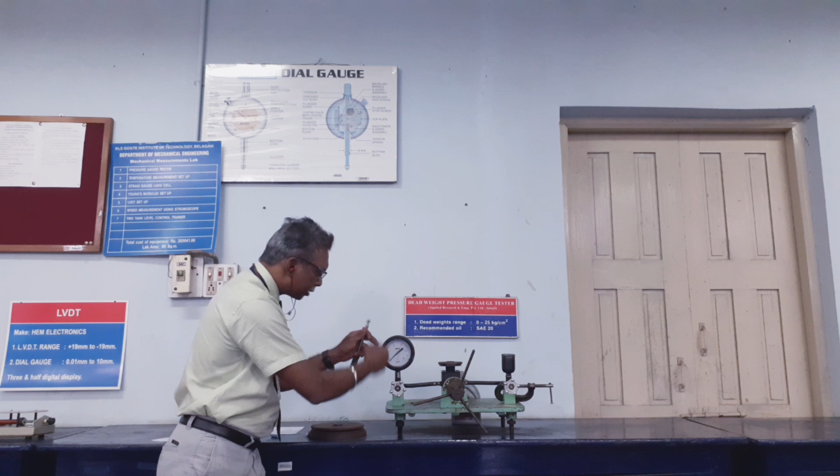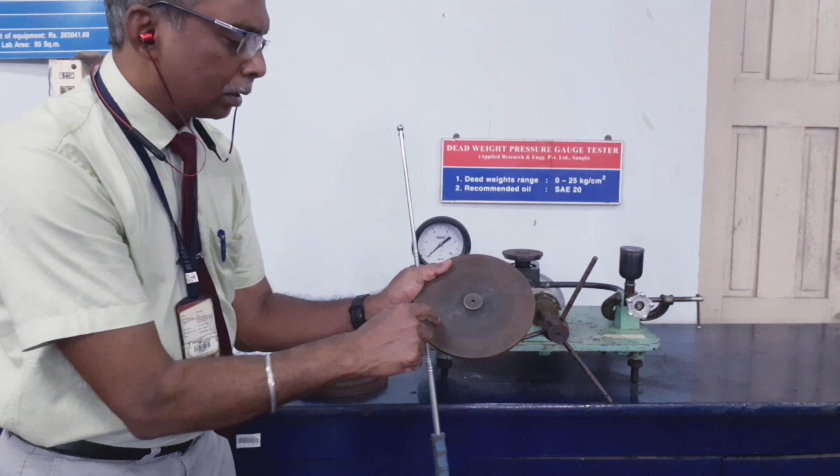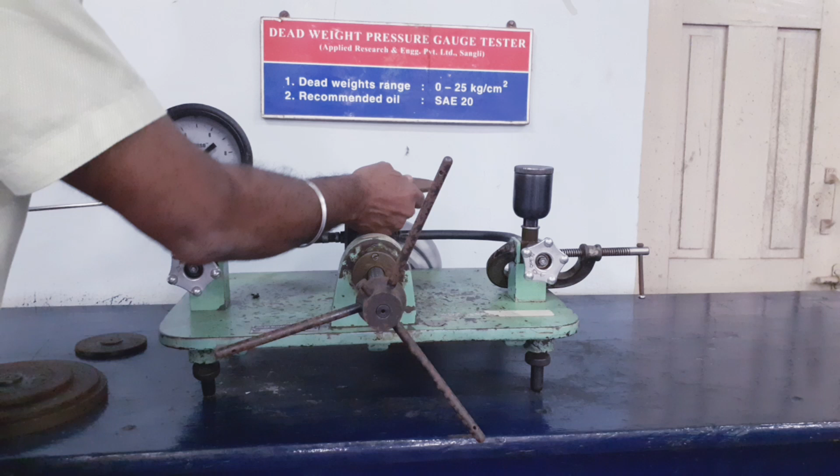For this we need something which can be used as a standard. What I mean, see here, if this pressure gauge indicates the value of 2 kg per centimeter square, I must be sure that I have applied 2 kg per centimeter square. So how do you make sure? See here, these are the plates, pressure plates, on which the value has been mentioned as 2 kg per centimeter square. When you place this above the platform, there is a platform here, and this self weight is 0.5. So when we place a weight of 2 kg here, the net weight will be 2.5 kg per

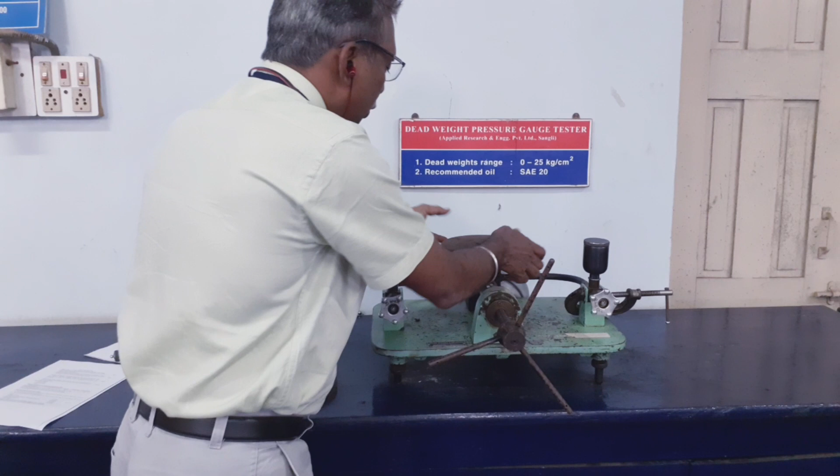centimeter square. Please note, I repeatedly say here that this itself is not 2 kg. This is not 2 kg. But when you place this entire casting, this is a cast product, one piece, on the platform, based on the cylinder diameter and the piston ring here, it will exert a pressure of 2 kg per centimeter square. Then when I am applying 2.5 kg per centimeter square, if the pressure gauge indicates 2.5 kg per centimeter square, it means that the pressure gauge is perfectly okay and it has a zero error.

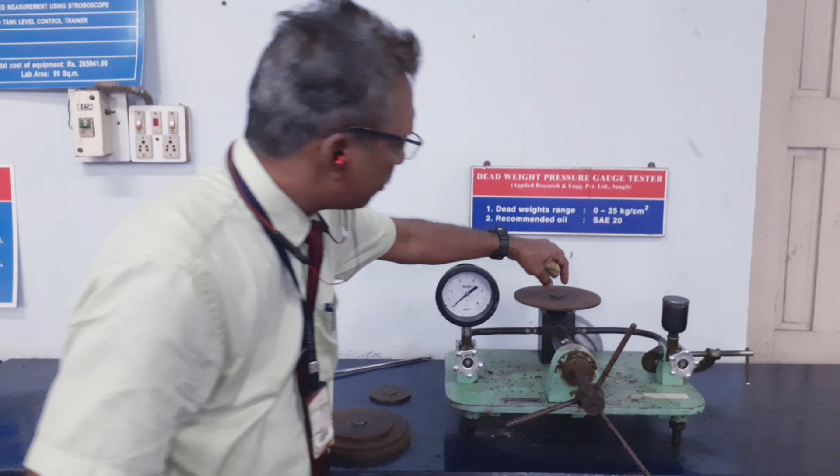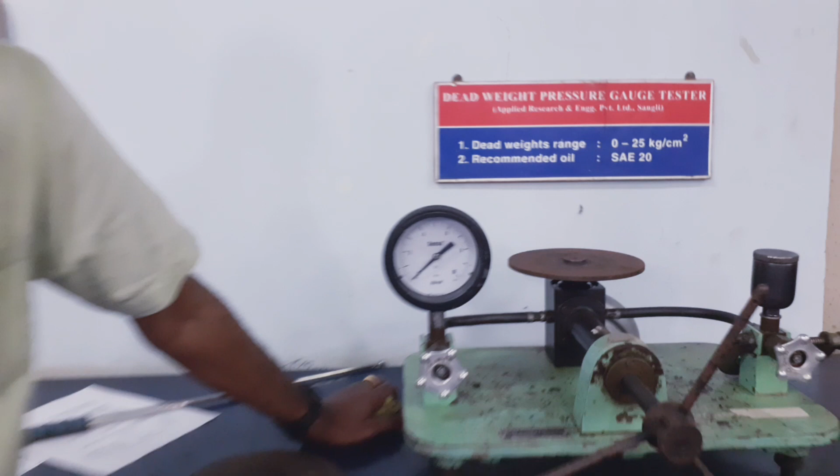Note that no instrument in the world has a zero error. The instruments will have some minor error here and there. We need to adjust with those or give the calibration. So the very purpose of calibration is to identify how much is the error, apply that error either on the plus side or on the minus side. Say I am sure that this is 2.5 kg, and if my pressure gauge shows 2 kg, I can say that whenever the pressure gauge shows 2 kg per centimeter square, the actual value is 2.5 kg per centimeter square. And if it is showing 3, then how much is it? We need to apply and find out.

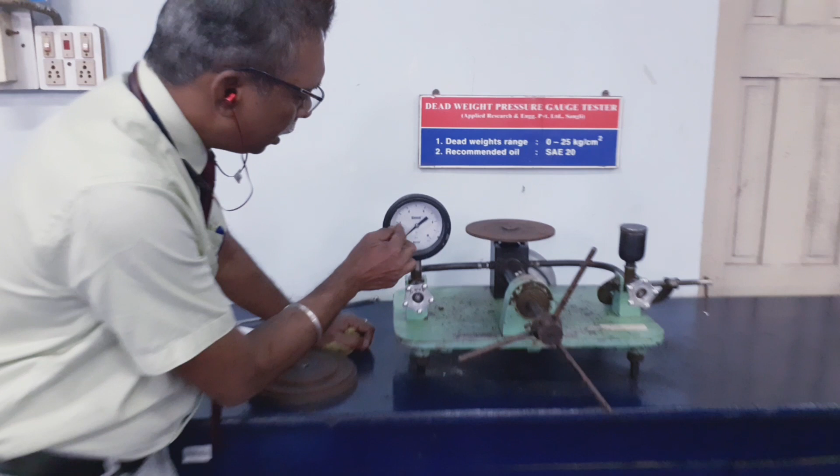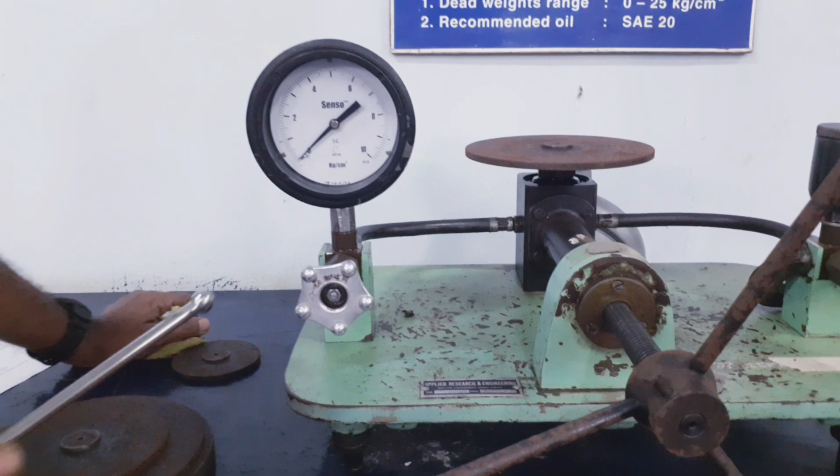Another question may come, sir, can we extrapolate the number? Say for 1 kg there is a 0.2 kg error. So can you say for 2 kg it is 0.4 and for 3 kg it is 0.6? Not necessarily. We are going to deal here with altogether different kinds of measuring systems. Some measuring systems may have linear errors. Some may have non-linear behavior. For example, the pressure gauge: up to 4 kg per centimeter square, it may have 0.1, 0.2 error. Once you cross 4 to 6, it may show 0.5 error. If you cross 6 to 8, it may show 0.8 error. We don't know how the instrument behaves.

So for example, the 50 feet tape. This must be easy for you to visualize. Because of the wear and tear on the ground, outside, rain, sun, and handling by workers, normally the first few inches of the 50 feet tape are cut off. It always happens. And we start measuring from the first foot onwards. Whenever the 50th foot is counted, we mean it is 49. What happened to that one additional foot? That was discounted right in the beginning because it was cut off, either 4 inch or 5 inch. We take a reading from the first foot right up till the 50th foot, so what remains is 49 feet.

But if you forget, 4 or 5 inches is getting deducted in your 50 feet every time. So this is a compounded error. Every time that you measure, you are losing 4 inch or 5 inch. But this can be minimized straight away. So it is linear error. You measure 50 times, each time you are measuring 4 inches less. So that is linear error. But in cases like pressure gauge or LVDT, the errors could be non-linear up to one range. So calibration is always done for a range.

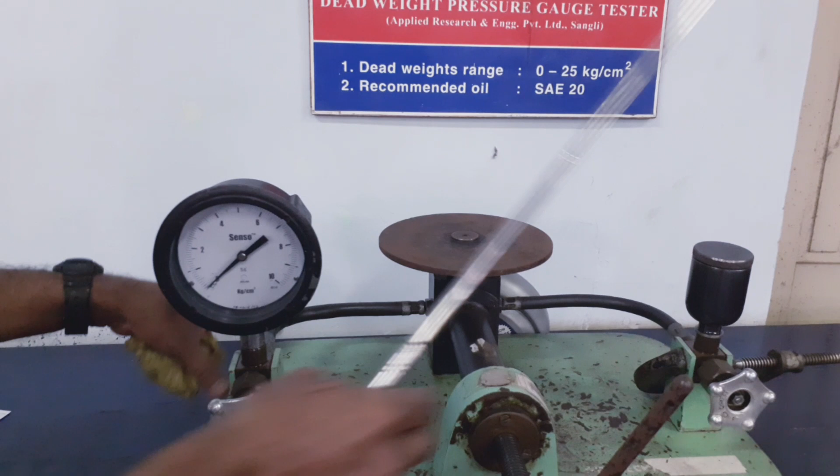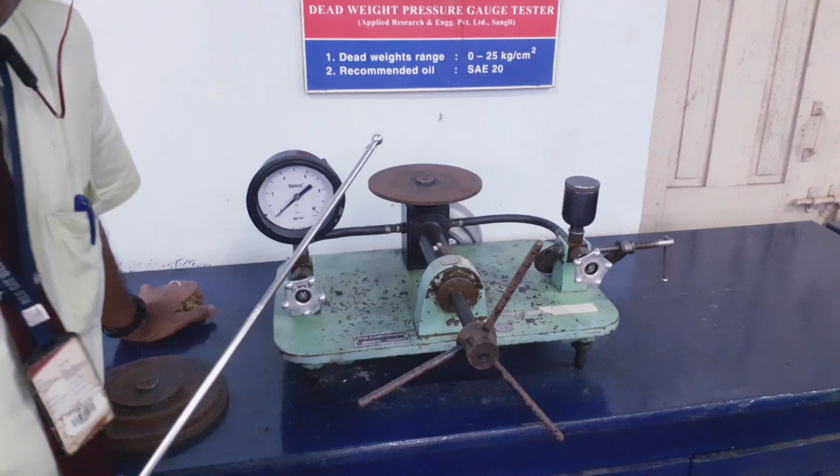See, I may calibrate with the dead weight here. This is a dead weight pressure gauge tester. Its range is 0 to 25 kg per centimeter square, which means that we can mount any pressure gauge which can measure up to 25 kg per centimeter square, and that can be calibrated. Now, for calibration of 25 kg, I need to have 25 kg weight with me. Then only I can calibrate, not otherwise.

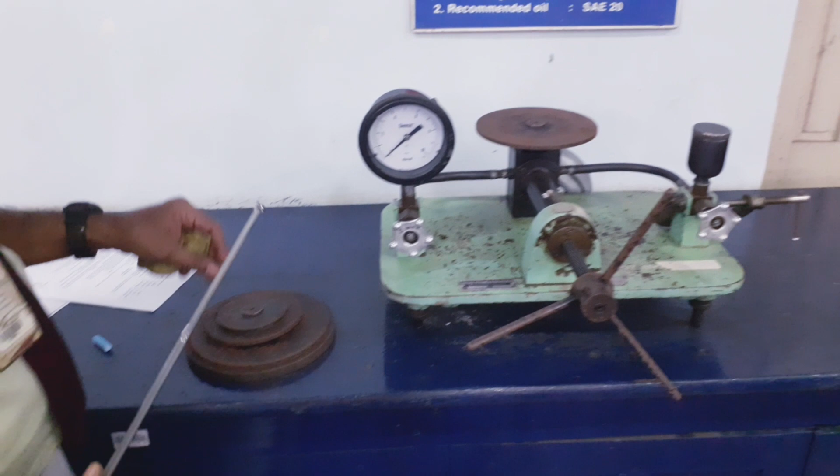And please note, the maximum is 10 kg per centimeter square. Now you may ask, sir, how do you calibrate this? If I give you another pressure gauge whose maximum is 10 kg, well, I can calibrate. If one of you wants to calibrate 25 kg, how do you do that? The process is simple. This instrument has the capability to measure up to 25.

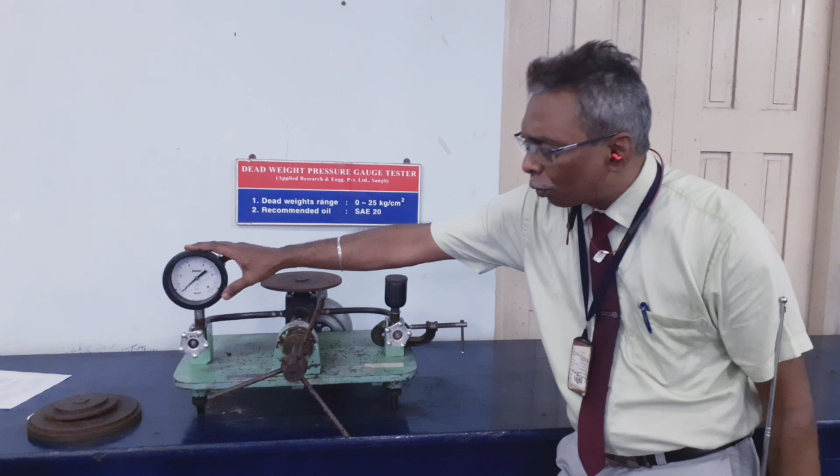Get additional weights. Make it 25 kg per centimeter square. Mount the pressure gauge. Calibrate it. Keep on adding the weights, and whenever the output is shown by the pressure gauge, compare it with the input. This is input, this is output. Then tabulate the results. Okay.

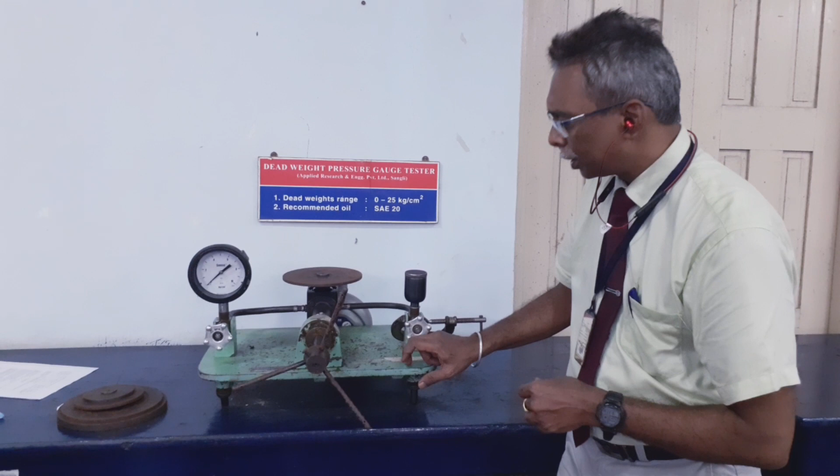Now let us come to the pressure gauge and its construction. This is our pressure gauge calibration setup. Its range is 0 to 25 kg. And the pressure gauge that we have mounted for testing is 0 to 10 kg. So which means that a 10 kg pressure gauge we can definitely calibrate here. One.

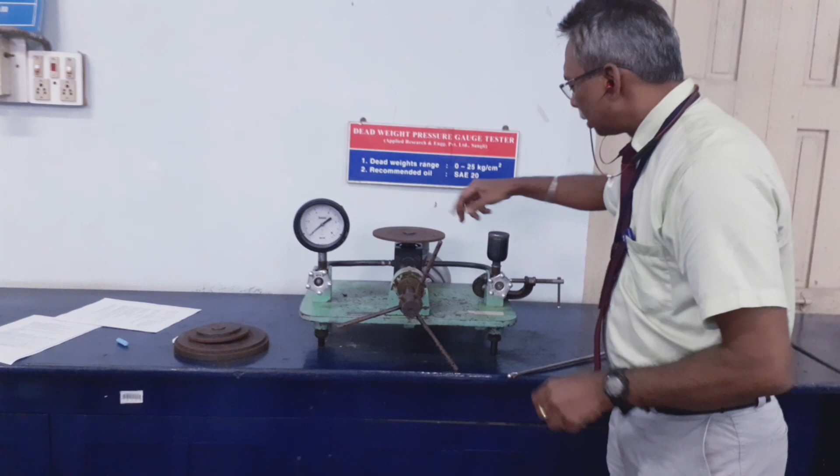Another thing is, this works on the principle of uniform pressure distribution across all the sections in a liquid column. Here the pressure oil has been filled, SAE 20 oil. SAE, Society of Automotive Engineers. So SAE 20 oil has been filled here right up to the neck, and this is a pressure cylinder, and this is a piston arrangement.

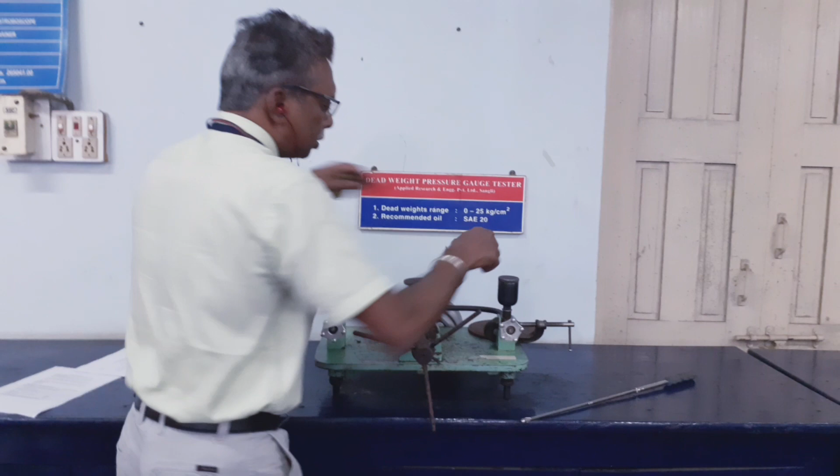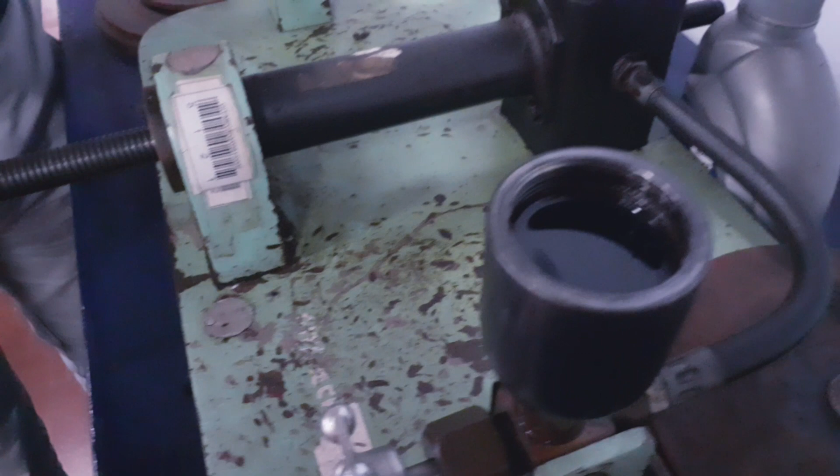Let me tell you the working of this pressure gauge. How does the pressure gauge work? Now please note, just one moment. Can you zoom in here? This is where the oil is being filled. Always make sure that the oil is filled up to the brink. See that the oil is right up to the brink here, and always also make sure that there is no

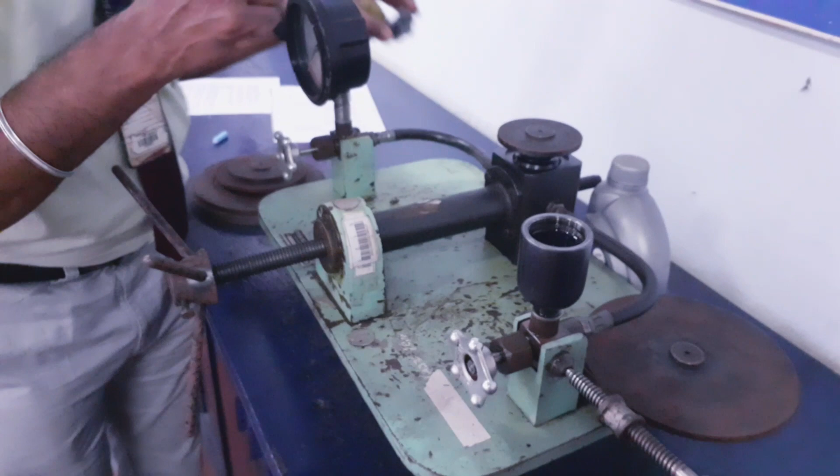air bubble formed. One very important aspect is that an air bubble can get into this trap, get into this pipe, and it can create disturbance. But if there are air bubbles, how to take them out? You can take a small wick, and then with the help of that wick, take out that air bubble. Once you are very sure that there is no air bubble, close this properly.

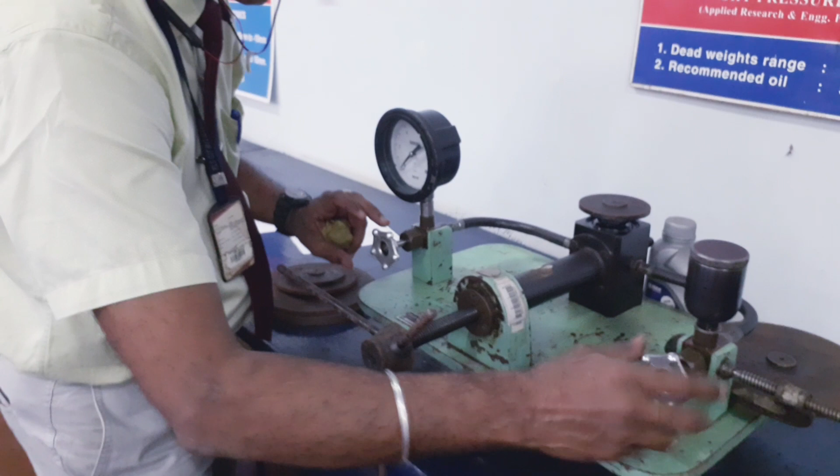Okay, now, what about the position of these two valves? Please note, once the oil is completely filled in this, we need to close this valve. Let me tell you why, what happens. See, this is open, this is closed. That is, anti-clockwise is open, clockwise is closed, so no issues. What happens if it is open?

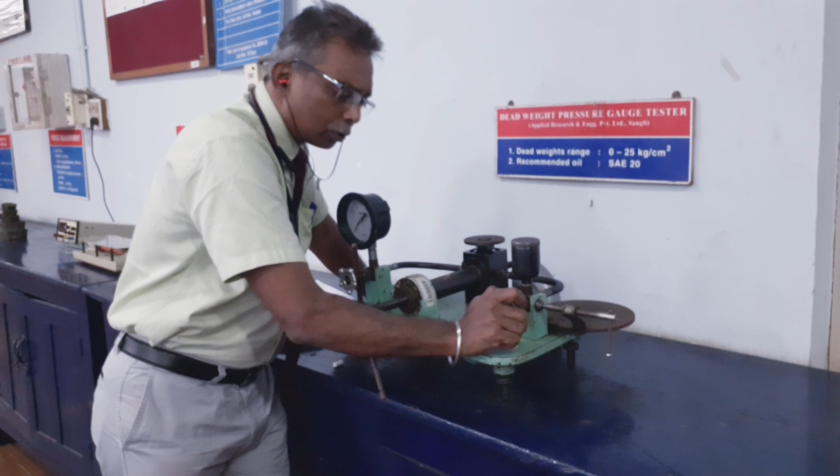Very simple. When I apply pressure here through clockwise rotation, the oil in the cylinder gushes out through the pipes here, and it oozes out of this container. So always make sure that the right side valve is closed. Okay. Left side valve. What is the function of this left side valve? Please note, this valve controls the oil flow to the pressure gauge.

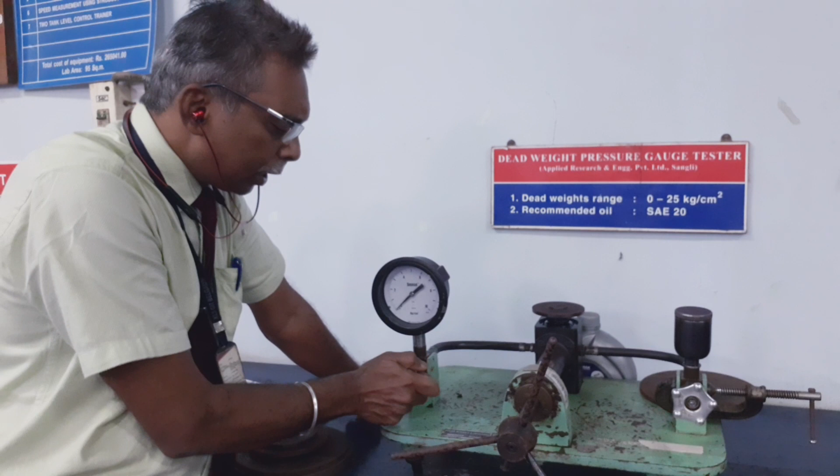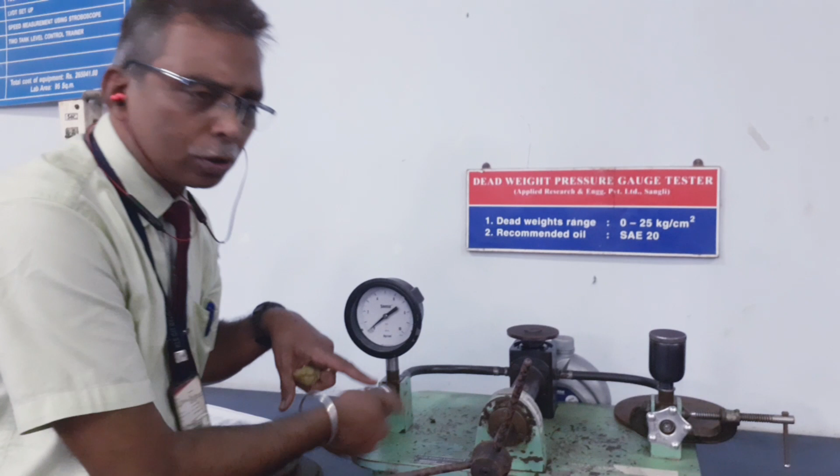Now, this is open. If I close this, let me show what happens. See, this is in closed condition now. The pressure gauge is closed. See, the very purpose is to calibrate this pressure gauge. And if we close this valve, how are you going to supply the oil pressure to the pressure gauge so it can show some reading? No chance. There is no oil here now.

No matter how much the pressure is here, you can see the pressure being applied. Okay, this is 0.5 kg, it got lifted up. But our pressure gauge is still showing 0. The reason being, it is not receiving the pressure. So keep this pressure gauge valve open. Always keep it completely open.

Then keep this closed. Then I will tell you the experiment. Always while checking the load condition, now we have applied 0.5 kg. This is 0.5 kg. By default, the platform itself is 0.5. And let me check whether my pressure gauge is showing 0.5 kg. How do I identify that 0.5 has been applied?

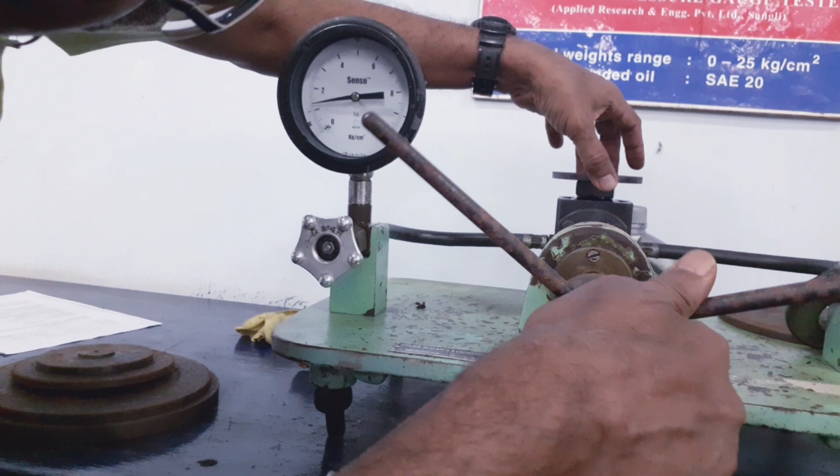That is by rotating the rod here on the piston cylinder element. Just gently keep rotating this, because this platform may get stuck in the piston cylinder element. At one point of time, this platform gets lifted up. That is the time when the pressure is 0.5 kg per centimeter square. Yeah, can you see this now?

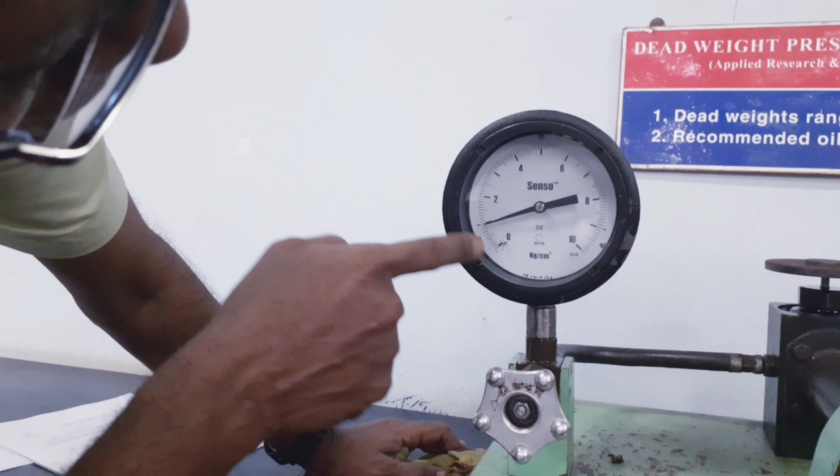Have a look. Why is it getting lifted up? Because there is oil pressure which is equivalent to 0.5. Okay. Now let us see our pressure gauge. What is the value it is showing? Our pressure gauge is showing 1 kg per centimeter square. It is nearer to 1, almost 1 kg, which means that this is defective.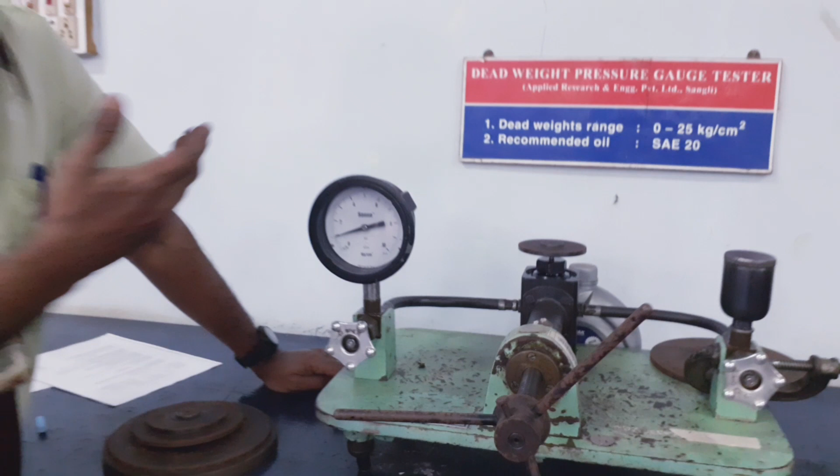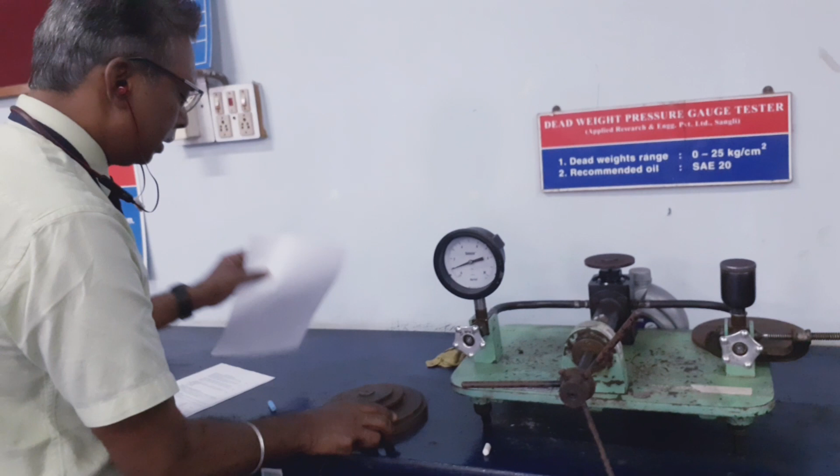At 0.5 kg per centimeter square, the pressure gauge is giving a value of 1 kg. Please, you need to note down this value. Later, I will write it on the board. I will tabulate this result. Just a minute, I will show you the result. So this is how the simple tabulation looks like.

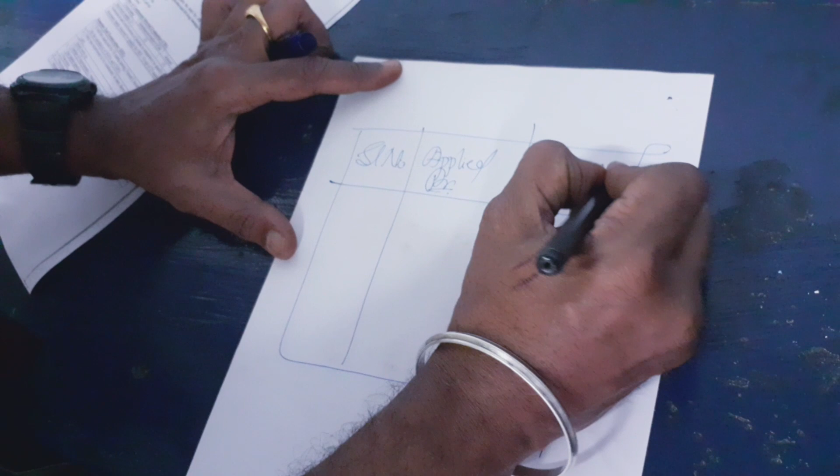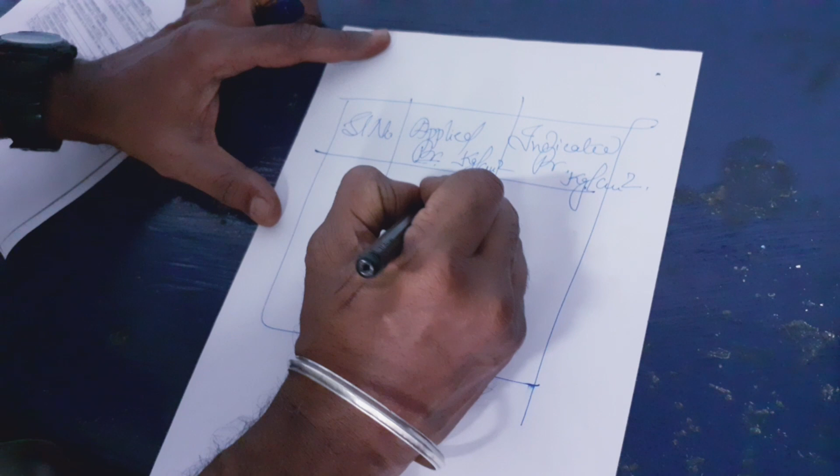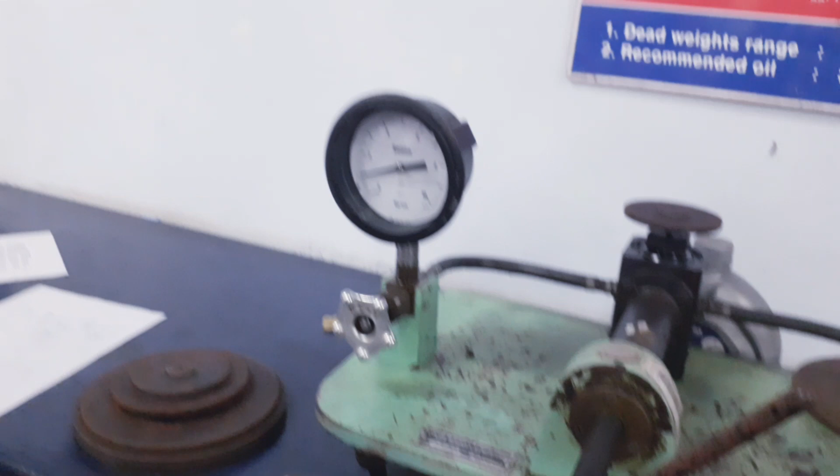3 columns: serial number, applied pressure, and indicated pressure. Both are in kg per centimeter square. Please note the units. So serial number 1, applied pressure is 0.5 kg per centimeter square. Then indicated pressure is 1 kg per centimeter square.

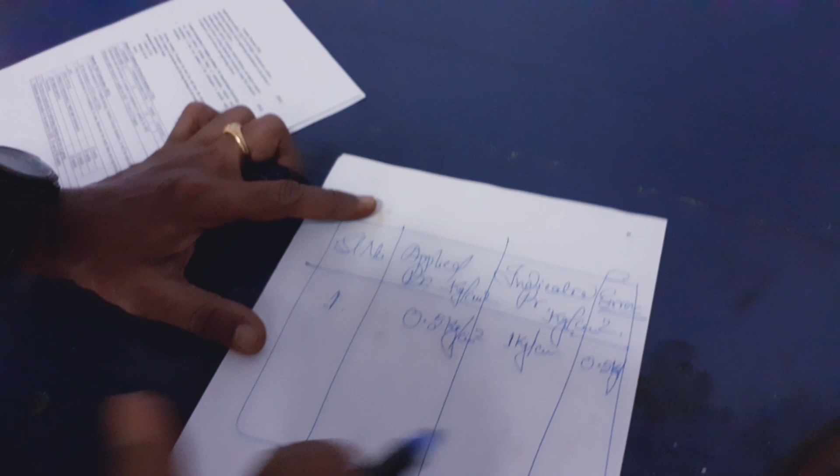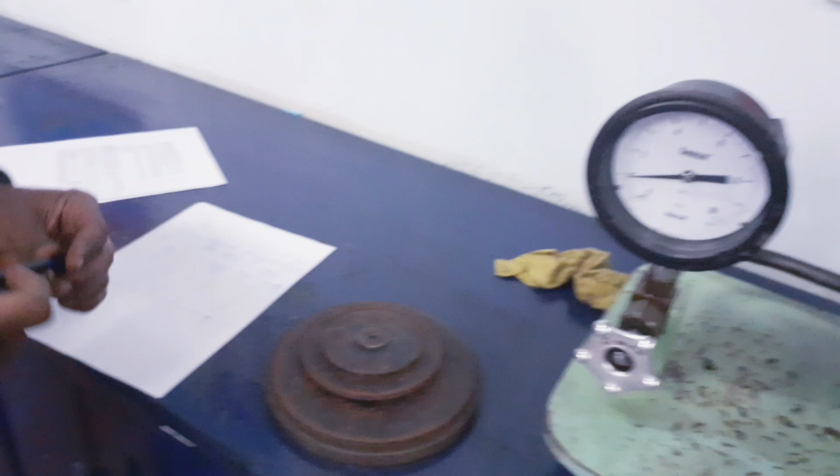The third section is error. Error is plus 0.5 kg per centimeter square. It is on the plus side; it is showing a higher value. Let me check what happens to my next value. Let me add the next part, that is another 0.5 kg. If you can observe here, it is mentioned 0.5 kg per centimeter square.

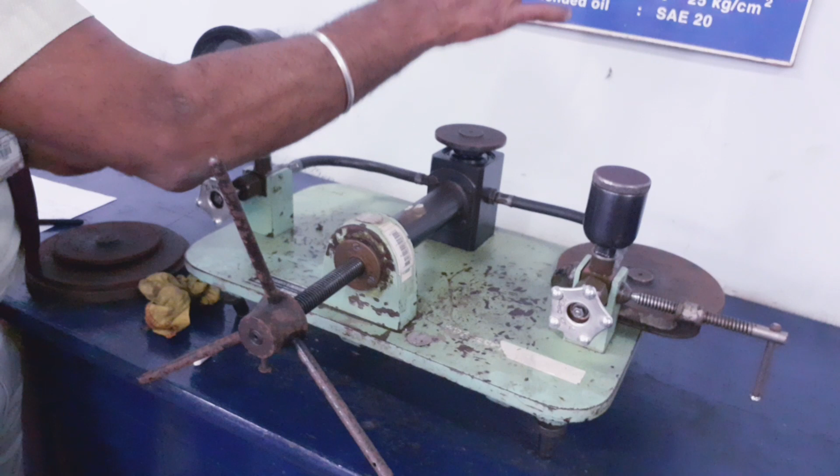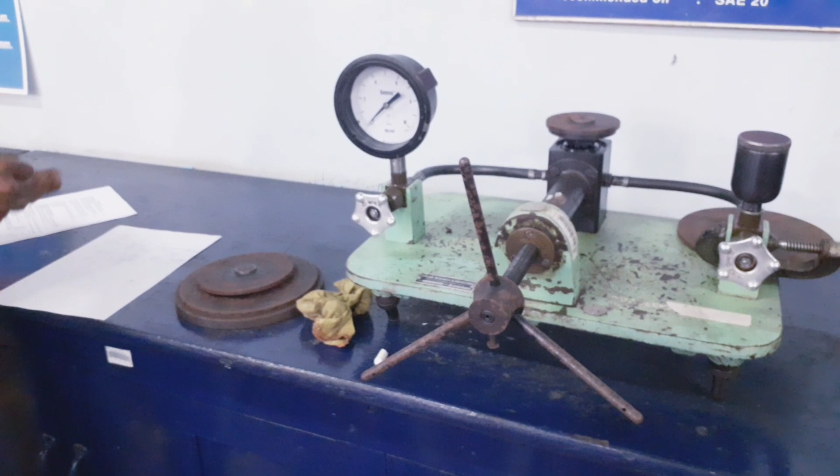Let me apply, and of course before that let me release the pressure. Okay, apply. Half kg is already existing, so effectively we are applying 1.0 kg per centimeter square pressure. Let me apply the pressure and see what pressure is shown by our pressure gauge. Gradually apply, and please rotate. One of you can rotate this and apply the pressure gradually.

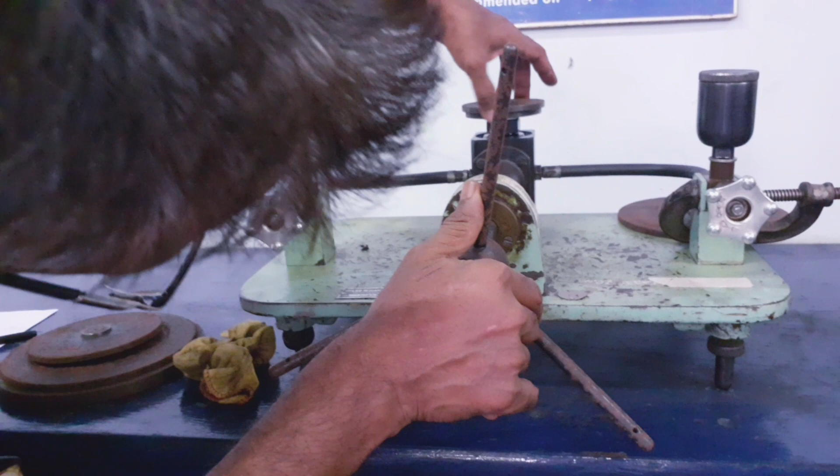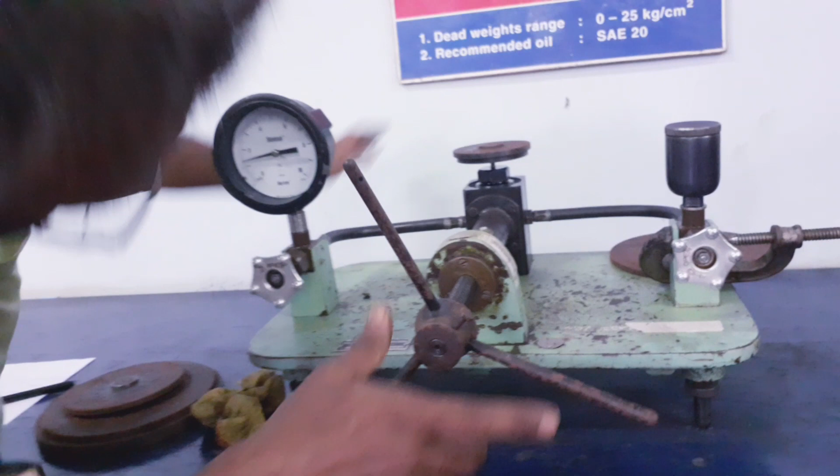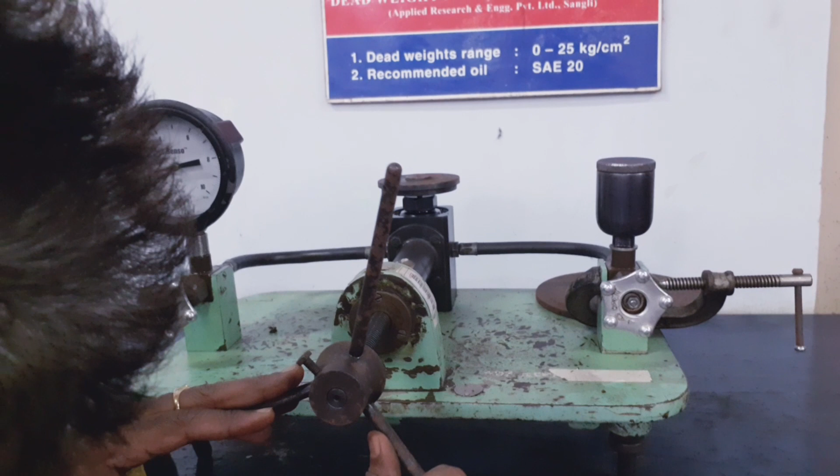At one point, when pressure is exactly equal to 1 kg per centimeter square, the platform gets lifted up. Can you see here? It is getting gradually lifted, it is not completely lifted though. Now it is completely lifted. Okay, now the platform is completely lifted.

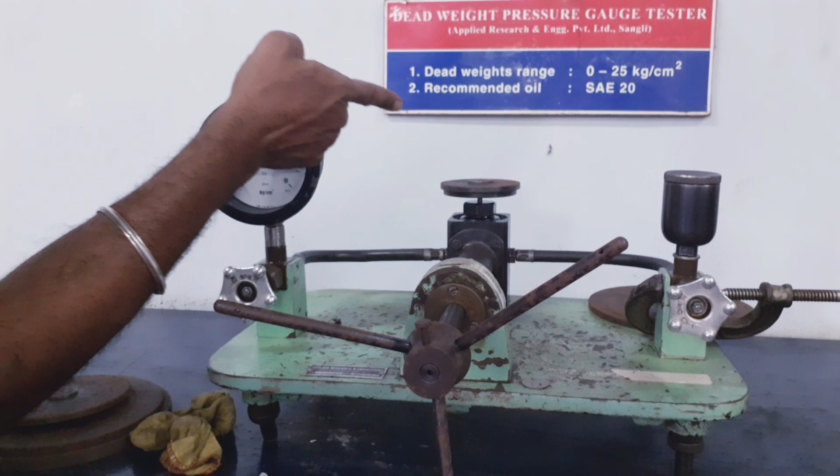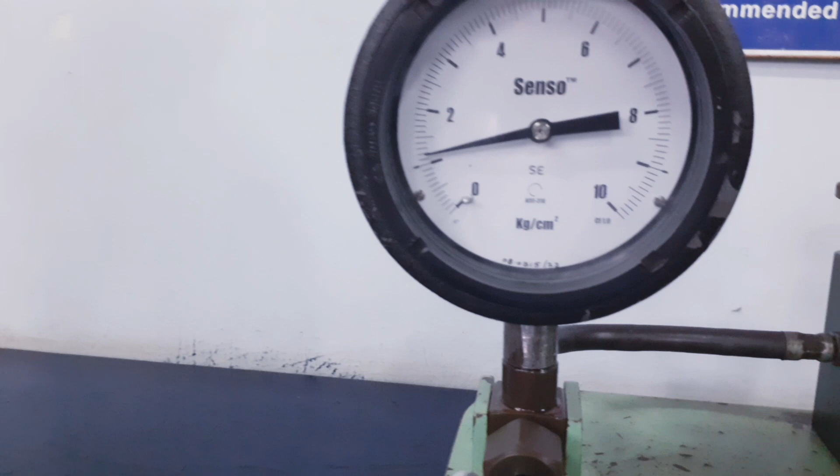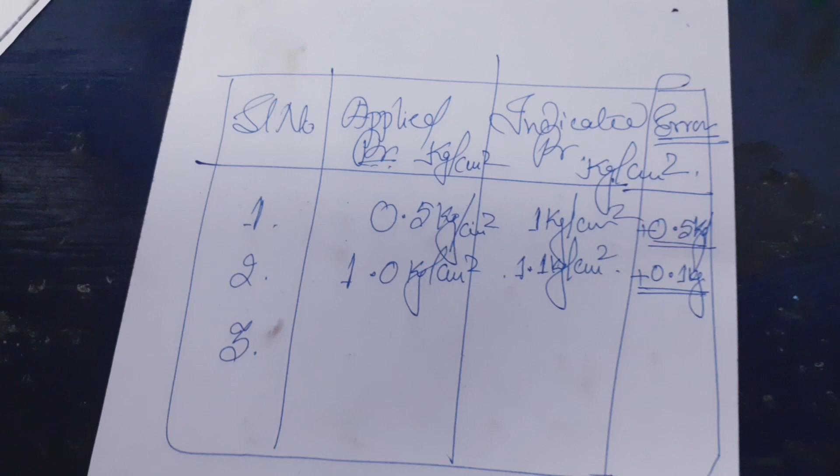Applied pressure is 1 kg per centimeter square, and the value shown here is 1.1 kg per centimeter square. That means plus 0.1 kg is the error. Now let me apply the third load: instead of half kg, I will apply 1 kg, so effectively I am applying 1.5 kg. Let me check how much is the value shown by the pressure gauge.

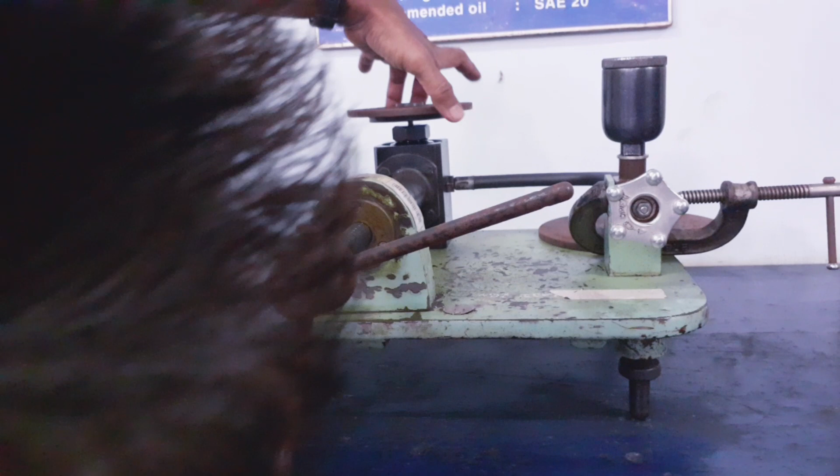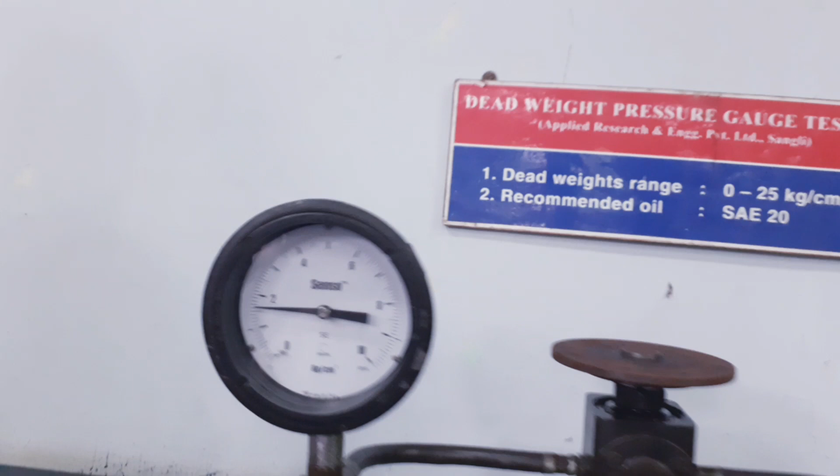Okay, done. Let me rotate, apply the load, keep rotating. Still the platform is not lifted. It is getting lifted now. I think it is lifted fully. No, not yet. Yeah, done. 1.5 kg is the applied load, and indicated load is 1.6 kg per centimeter square. So again we are getting an error of plus 0.1 kg per centimeter square.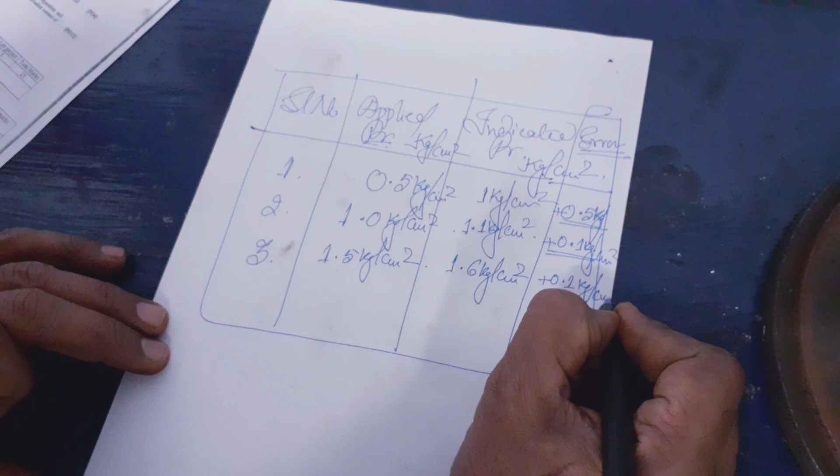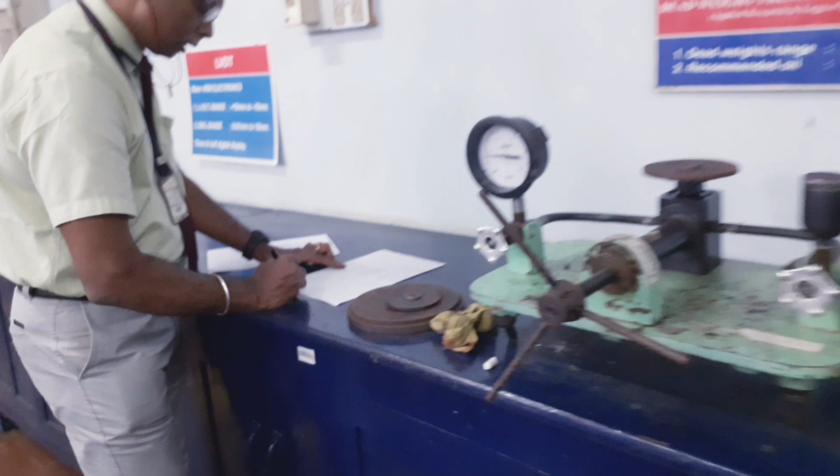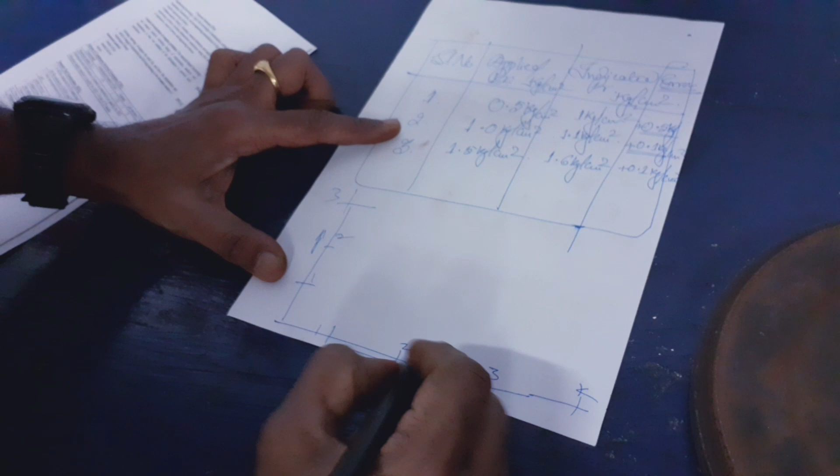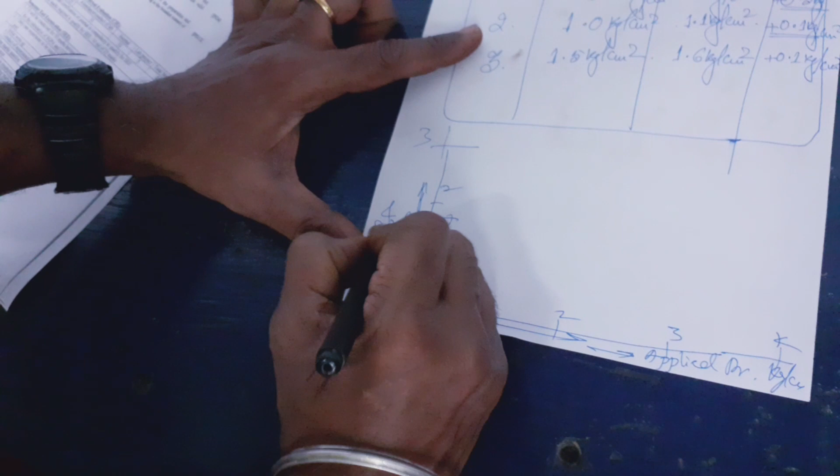Third reading. Likewise, we need to repeat this experiment for 4 or 5 sets of readings and then plot the graph. Please note, you need to plot a graph of applied pressure versus indicated pressure: 1, 2, 3, 4 on each axis. This is applied pressure in kg per centimeter square, and this is indicated pressure in kg per centimeter square. In the ideal condition, our line should be a straight line at 45 degrees. But it will never be like this.

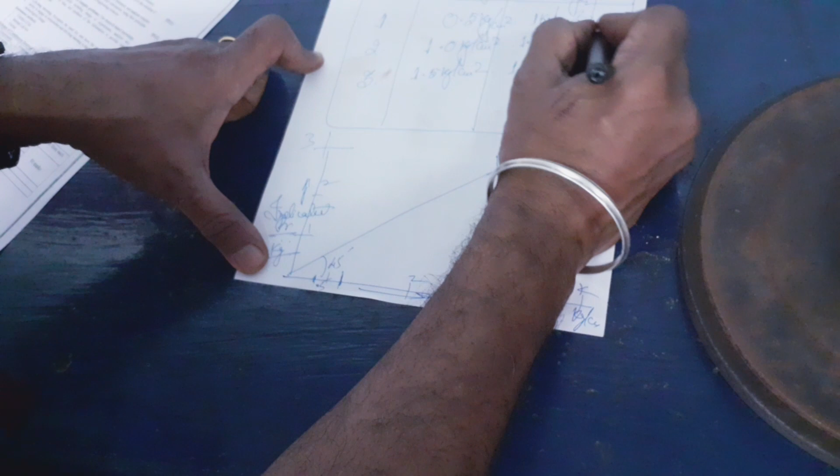As of now, at 0.5 kg, it is showing 1 kg, which is wrong. This is the first value. Next, at 1 kg, it is showing 1.1. Let us say this is 1.1. So this is the second value.

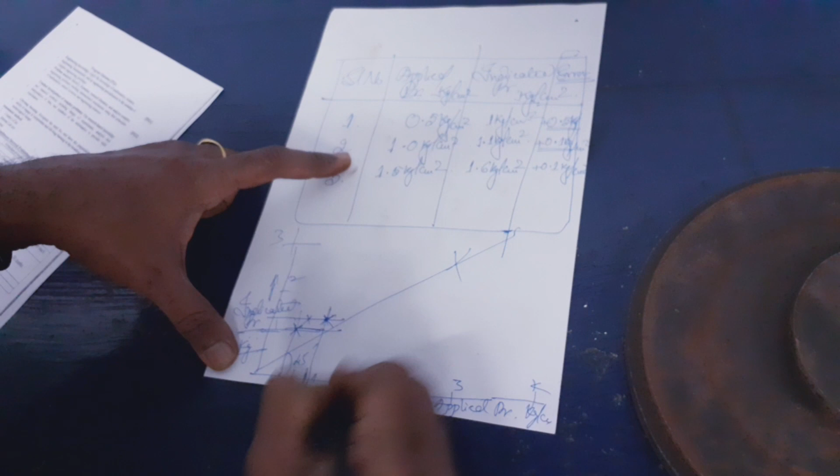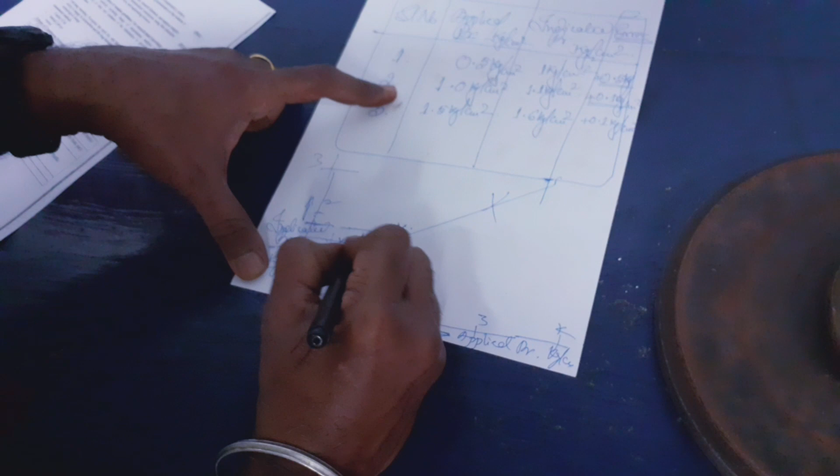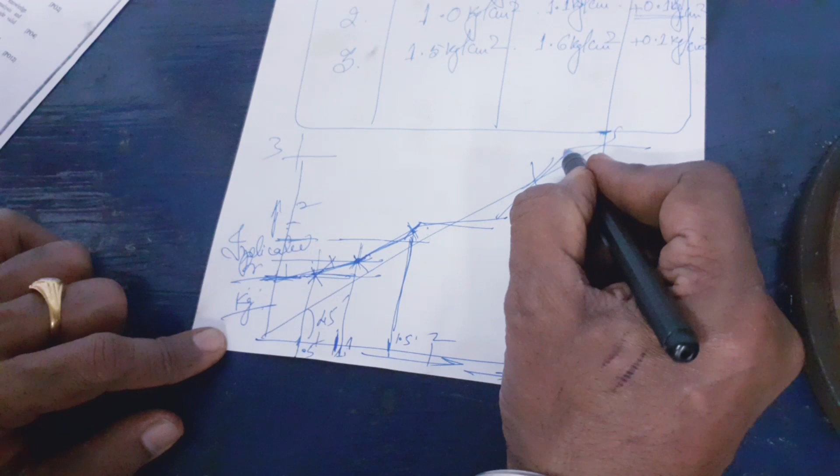Next, at 1.5 kg, it is showing 1.6. This is 1, this is 1.5, so 1.6 comes somewhere here. So the third point is 1.5 kg; this is the third reading. I have not continued the experiment, so it may behave like this, you never know. This is called the calibration curve. Either you can draw a smooth curve or a straight line. So this is what is called the calibration curve.

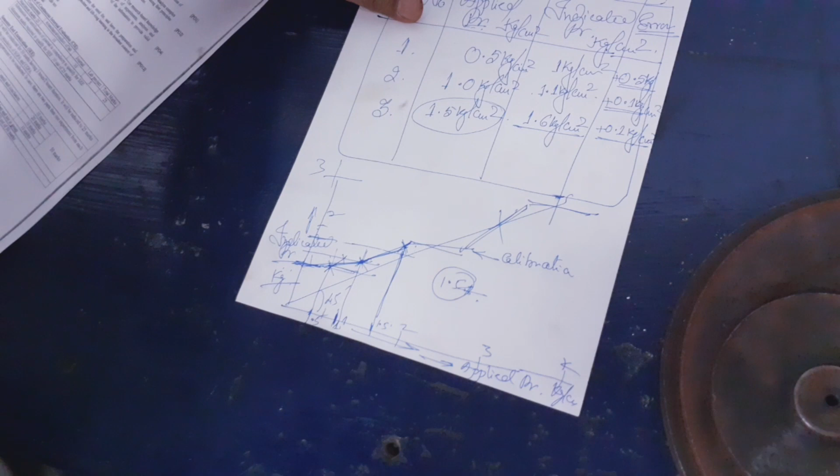Now, if one among you comes up with some weight, I don't know how much this is. I don't know the weight, I'll just check with the pressure gauge; it is showing 1.6 kg. Okay, now I'll just check 1.5 kg. I know the indicated pressure is 1.6. Then I say, yes sir, there is an error of 0.1 kg. The actual value is 1.5. I can confidently say about the weights or the component that you have given: though your pressure gauge is showing 1.6, I know my pressure gauge has an error of 0.1.

It is the same way with a watch. Somebody is asking, and in my watch it is 4:24, and I know it is 3 minutes ahead. So when somebody asks me the time, I'll tell him, gentlemen, it is showing 4:24, actual time is 4:21, because I know that it is ahead by 3 minutes. And what is this? This is nothing but calibration. In your mind, you are already calibrating the value.

Now you must have set your watches at home always 10 minutes ahead, so you reach in time. Normally in the morning it is ahead by about half an hour or 20 minutes. Somebody will have set it half an hour ahead. You may not know, and when you look at the clock and it shows 8 o'clock, you are in a hurry. No matter, it is 7:30 actually. It is calibrated to show 8 o'clock, whereas it is still 7:30, but it is in good interest.

But in engineering terms, in mechanical measurements and metrology, we need to make sure that all our instruments get calibrated on a regular basis, especially where it involves international trade, international transportation, high-end equipment, or components associated with health hazards and safety, like pressure gauges, our cookers, chemical components or medical applications. Please note, if your injection is supposed to give you 0.5 ml or 1 ml dose, and if your mark is wrong, 0.1 ml can make the difference between life and death. So we should know about this.

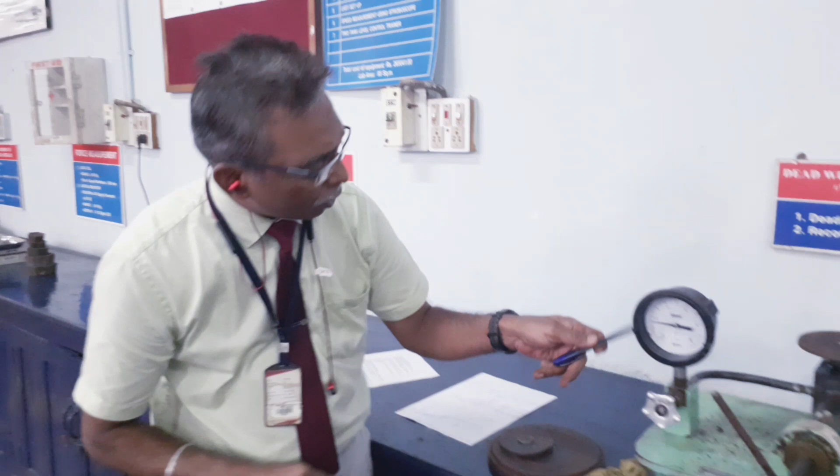You are always right because you have calibrated your measuring system, and as per the measuring system you have given the components. So unless you make sure that your equipment is calibrated, you cannot claim that it is exactly 4:25. I cannot claim it is exactly 1.6. See, I know this instrument has an error. I have checked just now.

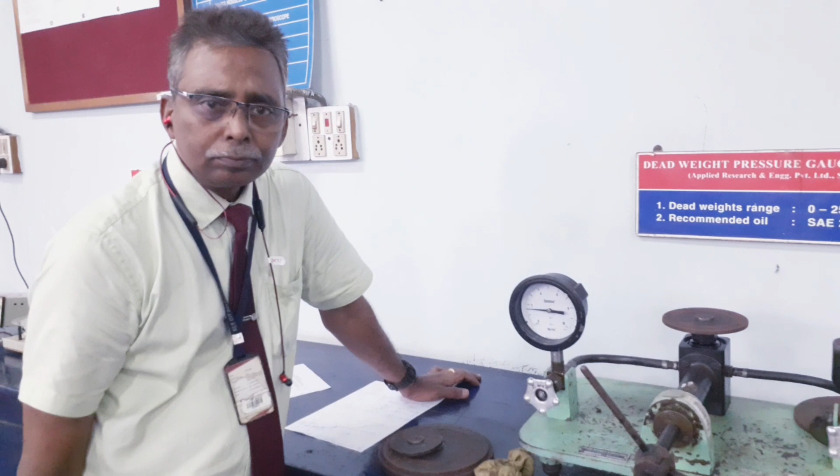When I use it elsewhere, at every point I'll check my calibration curve. When it shows 2 kg per centimeter square, I'll check at 2 what the actual value should be. Okay, actual value is 1.8. Then I can tell my customer, gentlemen, the pressure is 1.8. How did I come to know? I already know there is a built-in error in this. So I want you to look at how the pressure gauge is calibrated. Note down these 3 values and plot the graph with only these 3 values, never mind. When you come to the actual experiment, we can continue with another 2-3 sets.

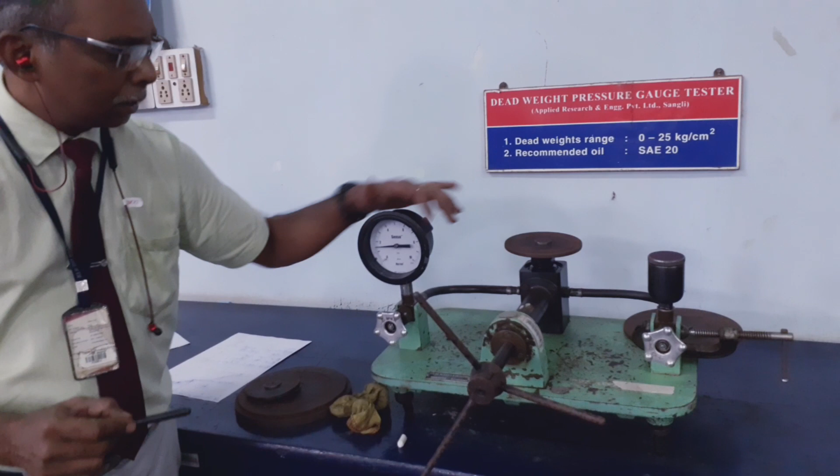Meanwhile, by next week, write the aim: calibration of pressure gauge. Apparatus: pressure gauge, additional weights, and the pressure gauge tester, called the dead weight pressure gauge tester. We need these 3. Next, the theory behind it is uniform pressure distribution across all the liquid columns. The oil used here is SAE 20. So note these things as inputs: the apparatus and the theory. Write down 1 or 2 paragraphs about the theory.

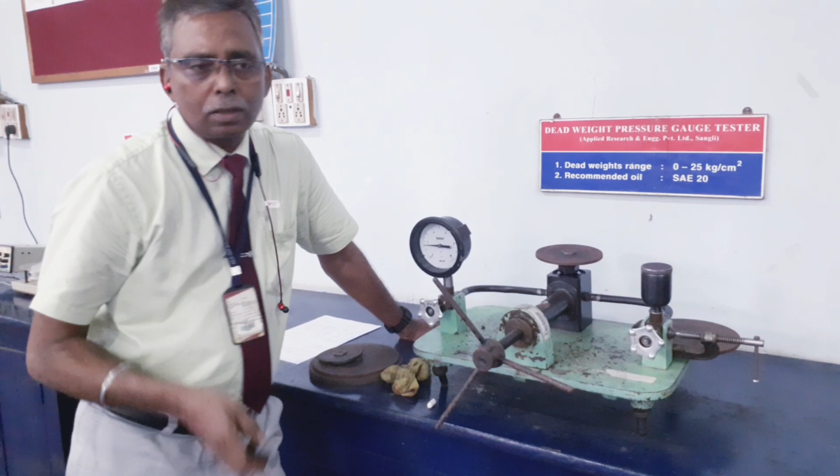Then comes the procedure, how the experiment is conducted. We will circulate it through WhatsApp, or it will be uploaded in our Google Classroom for mechanical measurements. Get yourselves enrolled, download that, and note it down. I think I'm done with my explanation for pressure gauge calibration.

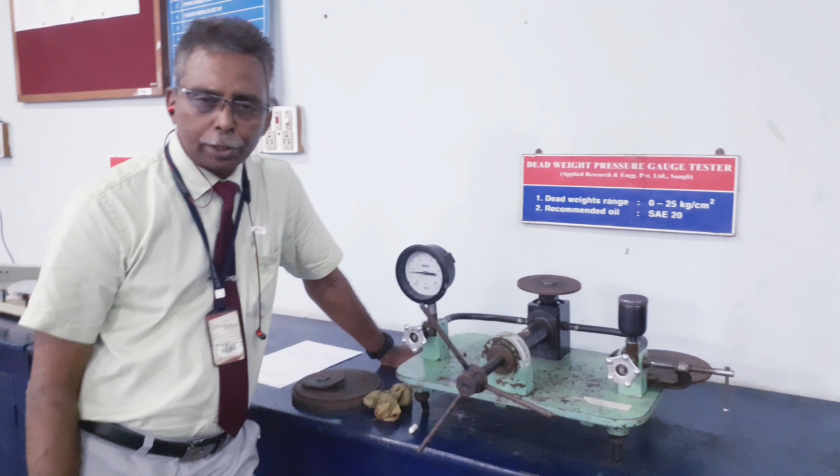We will look forward to your journal submission by this weekend, and by next Monday we want to see that all of you have uploaded it on our Google Classroom.